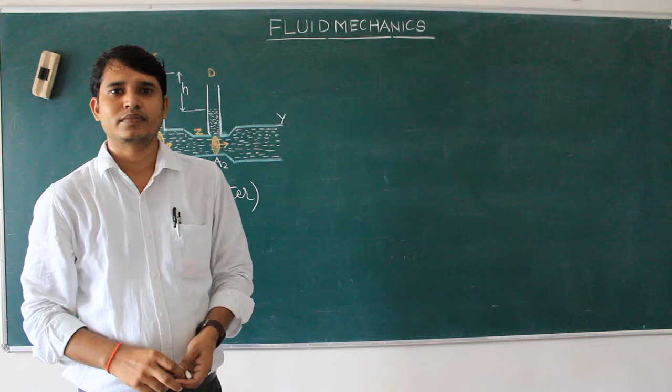आज हम लोग देखेंगे एप्लीकेशन ऑफ बर्नौली इक्वेशंस। हम लोगों ने बर्नौली इक्वेशंस कल देखा था, उसके थ्योरम्स को पढ़ा था, उसका स्टेटमेंट देखा था और हमने ये फाइंड आउट किया था। कल के लेक्चर का जो फाइंडिंग था वो ये था कि

If a non-viscous and incompressible fluid is flowing through any non-uniform cross sectional tube, then the total energy of the liquid, that means fluid, and that is pressure energy, kinetic energy and the potential energy remain the same at each and every point through the tube.

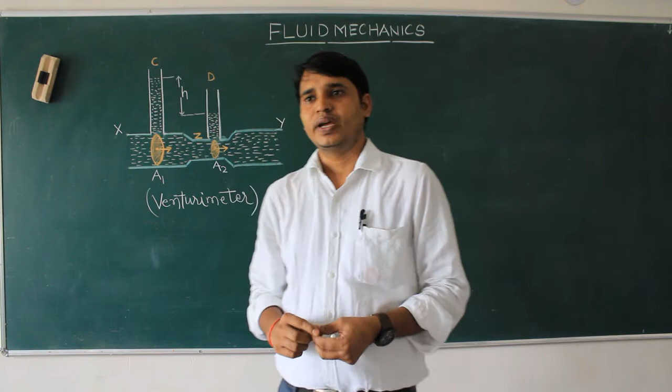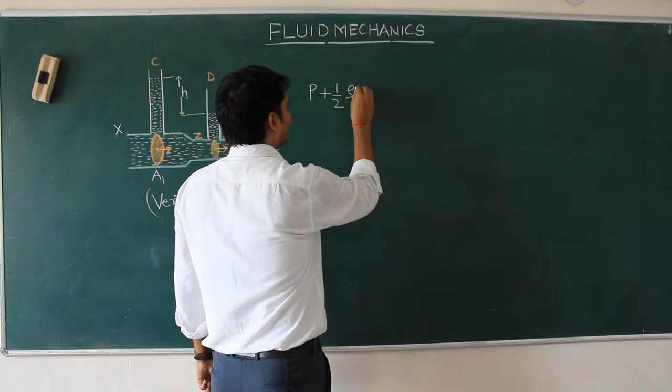This is the statement of the Bernoulli equations। और हम लोगों ने ये equations देखा था, फाइंड आउट किया था, that is P plus half rho v square plus rho g h equals to constant, and this is known as the Bernoulli equations.

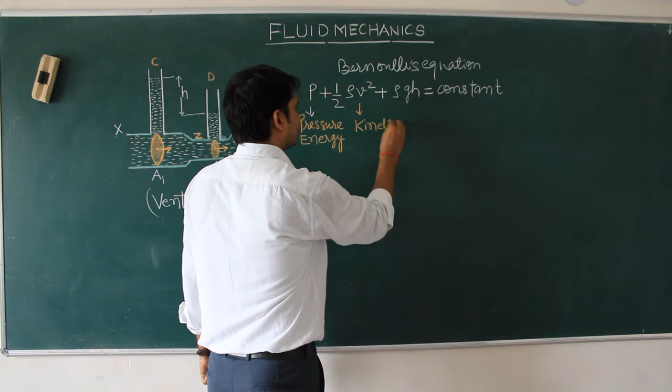This is the Bernoulli equation. Where this one is the pressure energy, pressure energy of the liquid. This one is the kinetic energy, and here this was the gravitational potential energy, I mean simply say potential energy.

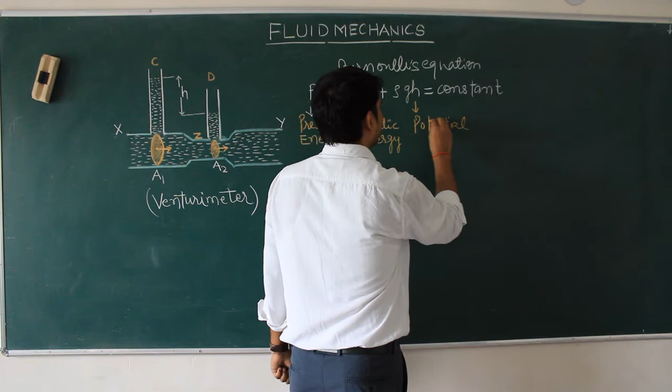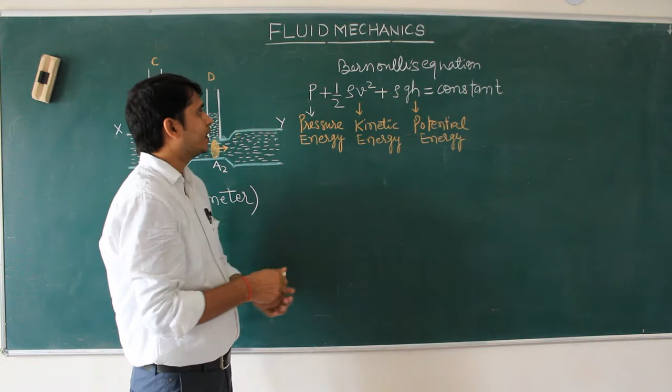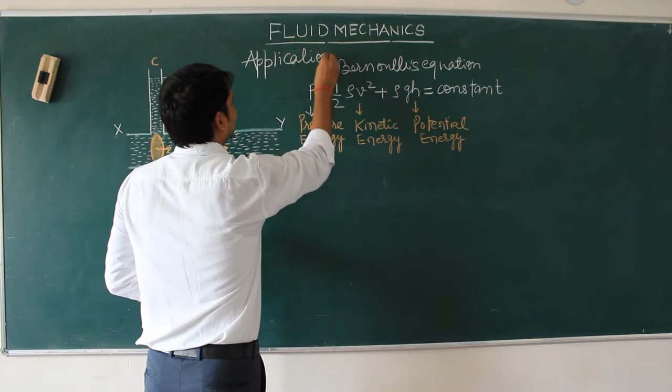इस इक्वेशन को कल हम लोगों ने देख लिया था, पढ़ा था, समझा था कैसे आता है। आज हम लोग देखेंगे एप्लीकेशन ऑफ बर्नौली इक्वेशन। आज हम लोग एप्लीकेशन करेंगे, एप्लीकेशन ऑफ बर्नौली इक्वेशंस। इस इक्वेशन को हम लोग कैसे यूज करेंगे उसको देखेंगे।

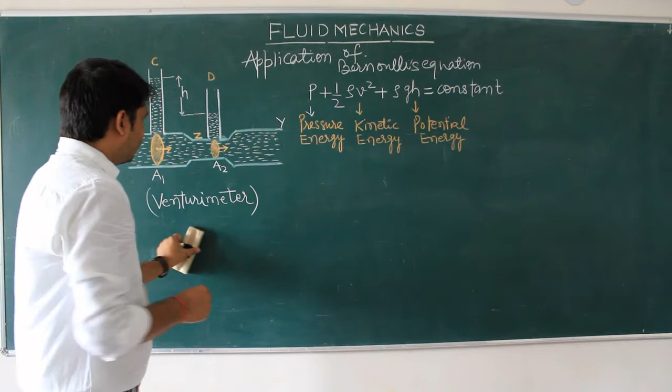तो एप्लीकेशन ऑफ बर्नौली इक्वेशंस में हमारे पास एक ऐसी डिवाइस है जिसको हम लोग वेंचुरी मीटर कहते हैं। वेंचुरी मीटर के माध्यम से एक ऐसा इंस्ट्रूमेंट है जिससे हम रेट ऑफ फ्लो फाइंड आउट कर सकते हैं। किसी भी लिक्विड के थ्रू, किसी भी ट्यूब के थ्रू यदि कोई लिक्विड फ्लो कर रहा है स्ट्रीमलाइन मोशन में, तो we can easily find out the rate of flow through that tube or that pipe.

So basically this Venturi meter is a device which is based on the principle of this Bernoulli equations, and इस principle पे based है कि जब भी liquid flow करता है तो इसकी point to point pressure and velocity of the liquid varies। जिस पॉइंट पे प्रेशर ज़्यादा होगा, वहाँ पे वेलोसिटी की वैल्यू कम होगी, और जिस पॉइंट पे प्रेशर की वैल्यू कम होगी वहाँ पे वेलोसिटी ज़्यादा होगी। This is the basic principle of this Venturi meter, at least this is how it works।

यदि हम कंस्ट्रक्शन की बात करें इस वेंचुरी मीटर का कैसे कंस्ट्रक्टेड होता है, तो there are two tubes X and Y are connected by a narrow coaxial constricted tube Z। ये X and Y ट्यूब जिसकी हाइट सेम होगी, सेम हाइट की है, so there will be no potential difference, there is no change in potential energy of the liquid which is in this tube, in X and Y.

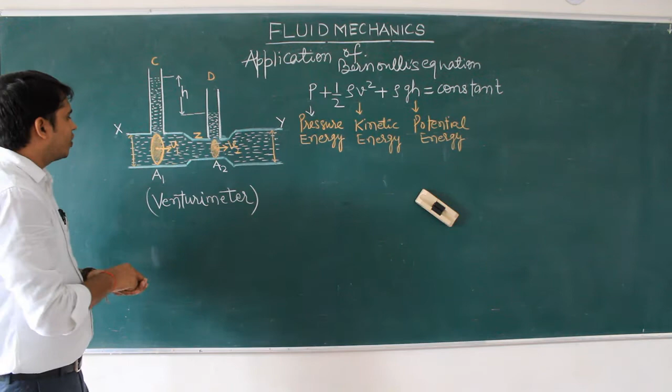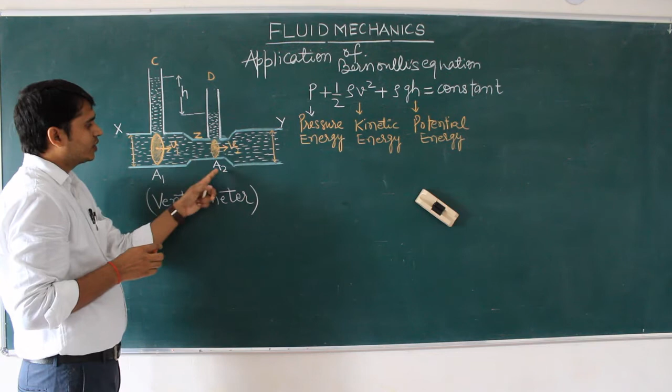So if the fluid is flowing in streamline motion throughout this tube, then according to the principle of continuity, the product of cross-sectional area of this section and the velocity will be equal to the product of the cross-sectional area of this section, that is A2 into V2. ये तब होगा जब लिक्विड एक स्ट्रीमलाइन पाथ को फॉलो करती है। तो ये सारी कंसेप्ट को हम लोग यूज करेंगे इसमें।

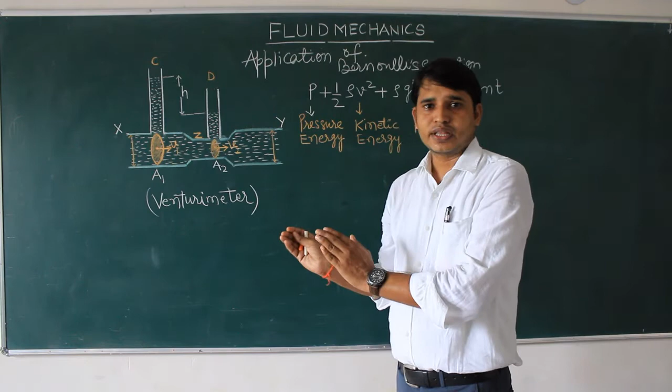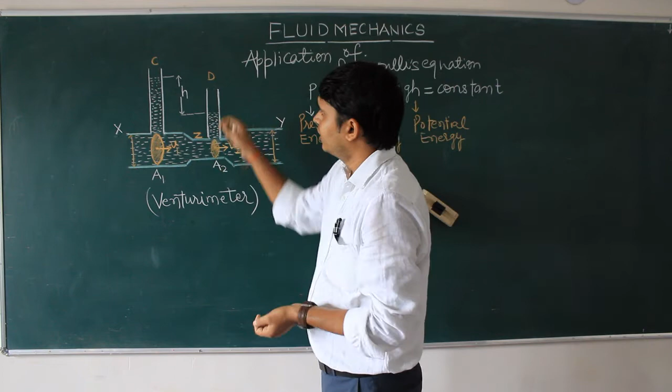इस तरीके का कंस्ट्रक्शन है वेंचुरीमीटर में। इसमें दो ट्यूब X and Y are connected by a very narrow coaxial tube, that is Z, and there are also two tubes, that is C and D, also connected vertically to this tube, and these are used to find out the level of this liquid which rises up and falls। तो ये पूरा का पूरा वेंचुरीमीटर का कंस्ट्रक्शन है।

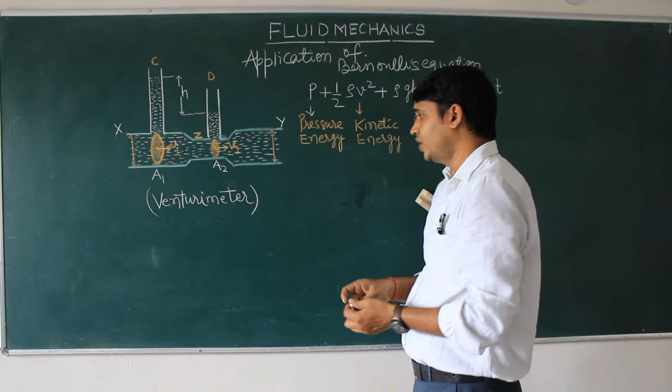अब कैसे हम लोग बर्नौली इक्वेशंस को अप्लाई करेंगे इसमें, इस इंस्ट्रूमेंट के माध्यम से, with the use of this वेंचुरीमीटर, how can we calculate the rate of flow of the liquid or the volume of the liquid flowing per second through this pipe? We have to calculate this। तो चलिए स्टार्ट करते हैं।

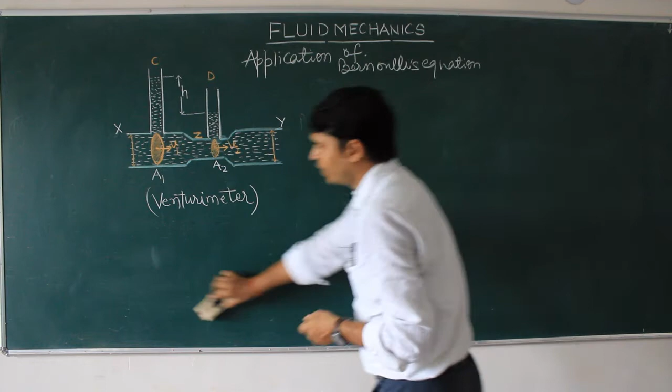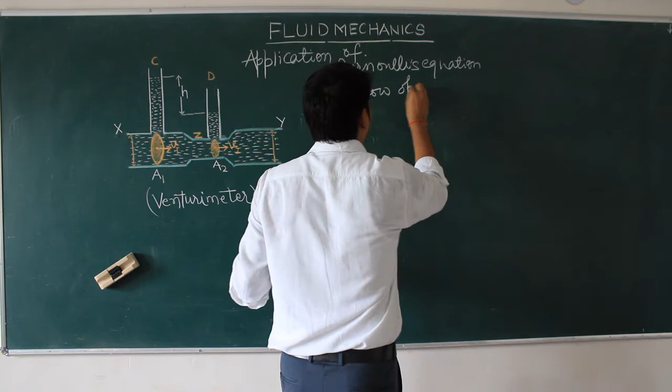तो हम पहला ये जो कंसेप्ट है वो हम लोग यूज करेंगे प्रिंसिपल ऑफ कंटिन्यूटी की। यदि लिखें, if the flow of liquid is streamline, then according to principle of continuity,

according to principle of continuity, we have the product of cross-sectional area at X, that is A1 into V1, must equal to A2 into V2.

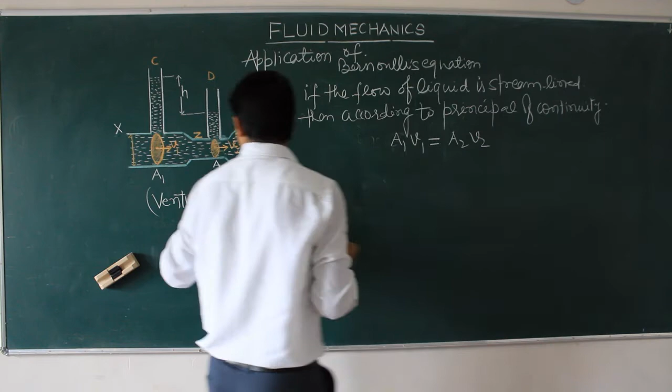The velocity of the liquid will be larger than the velocity of the liquid at this cross section, because the pressure is low here and here the pressure is very high। If the pressure is P1 and pressure here is P2, then here is the low pressure, the maximum velocity, and here is the high pressure, then velocity will be minimum.

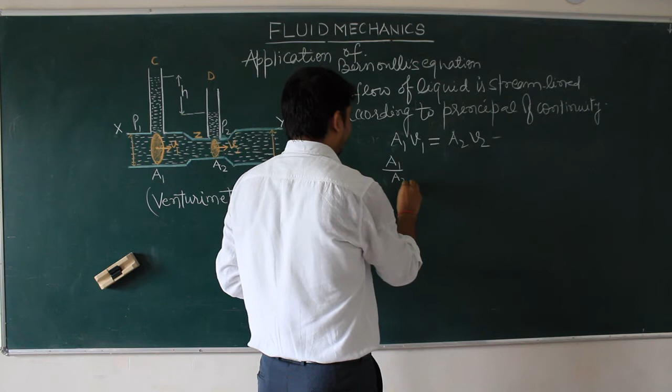So if you arrange this, A1 by A2 equals to V2 by V1.

We will use this equation.

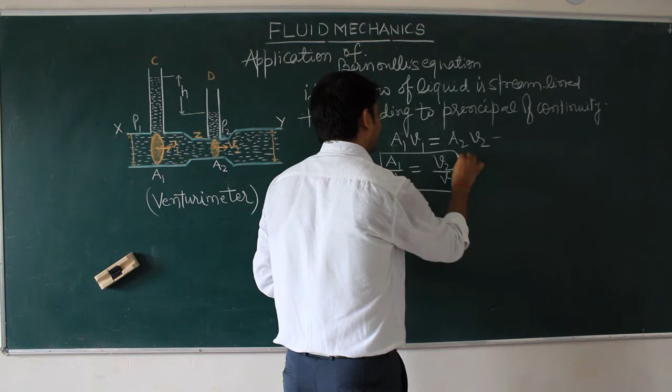If we talk about the energies in liquids, there will be a pressure difference, there will be pressure P1 and P2. There is also kinetic energy of the liquids.

But the potential energy of the liquid will be constant, because the height, this level, is the same. So there will be no change in potential energy. So we only have the pressure energy and kinetic energy of this tube.

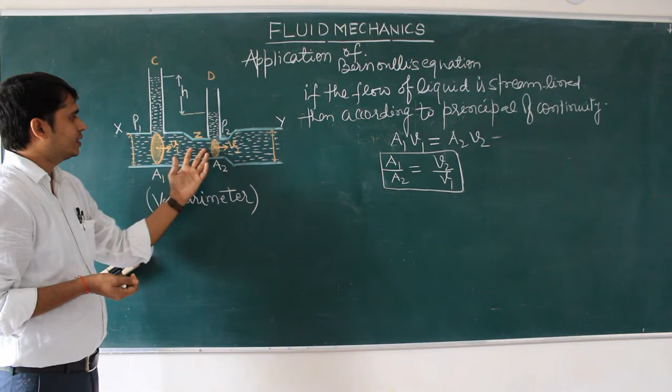If the tube is placed such that liquid is flowing in a horizontal plane, then horizontally, there will be no change.

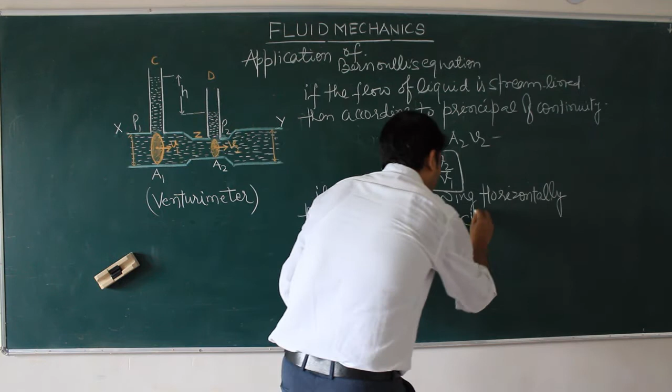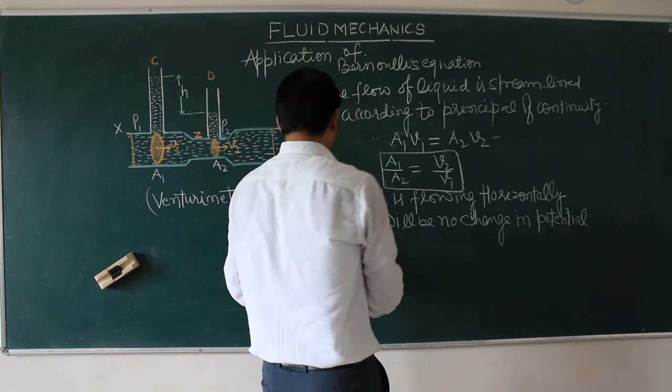There will be no change in potential energy. Only we have pressure energy at this end and kinetic energy at this end.

Using Bernoulli's equation, Bernoulli's theorem, we have P1 plus half rho V1 square equals to P2 plus half rho V2 square.

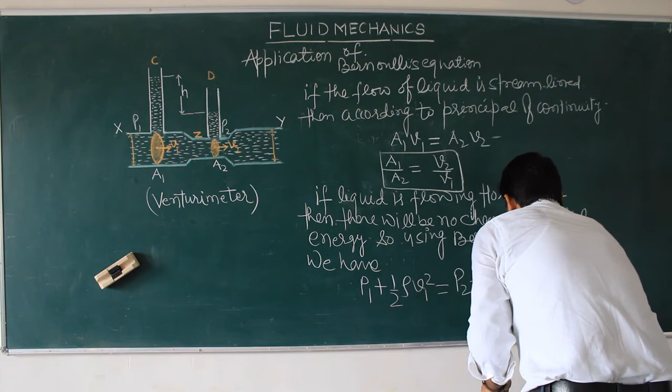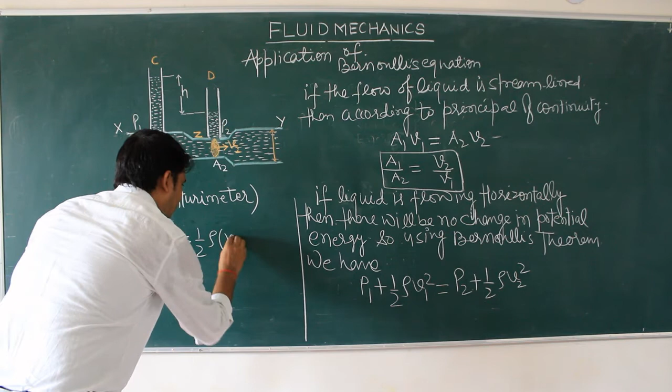So if you arrange this equation, we have P1 minus P2 equals to 1 by 2 rho, V2 square minus V1 square.

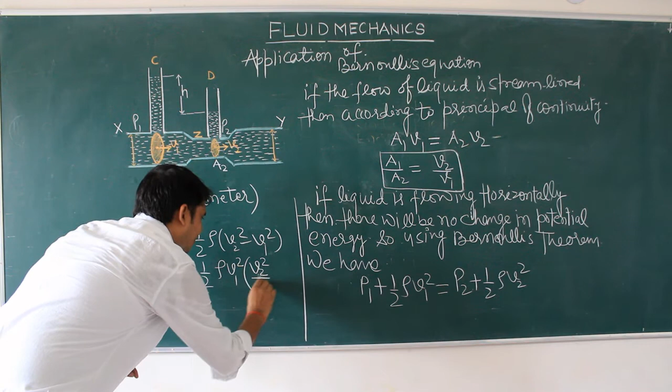So taking this half rho, and taking V1 square outside this bracket, we have V2 square by V1 square minus 1.

If you use these relations, V1 will be V1 equals to A2 under root 2gh over A1 square minus A2 square. This is the velocity flowing through cross-sectional area A1.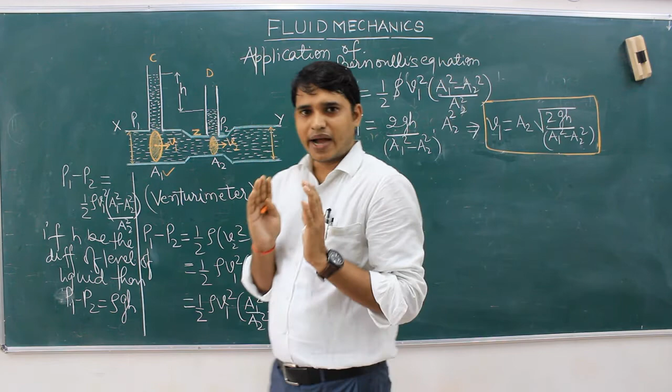So if you wish to find out the volume flowing through this cross-sectional area, we must multiply this cross-sectional area A1 with this velocity V1. By this we will find out the rate of flow of liquid through this tube, the volume flowing per second through this tube.

So the volume flowing per second through this cross-sectional area A1 will be V equals to A1 times V1.

So just write down this value of V1 here. So we have A1 into A2 under root 2gh over A1 square minus A2 square. So the net volume flowing per second will be A1 A2, 2gh over A1 square minus A2 square.

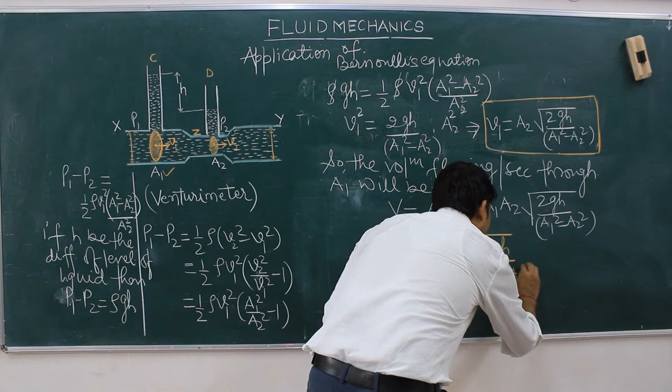This is the rate of flow of liquid through this tube. So with the help of this device, that is venturimeter, which is based on the principle of Bernoulli's equation, we can find out the rate of flow of liquid through any tube in which liquid is flowing. This is the volume of liquid per second flowing through this tube.

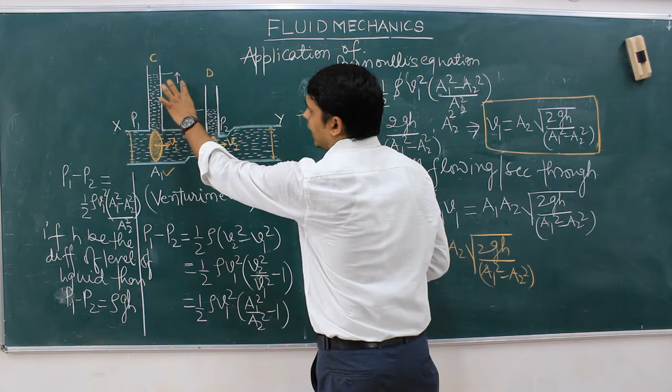If we find out the value of cross sectional area A1 and A2, and the difference of level of the liquid H, then we can easily find out the volume which is flowing per second through this tube.